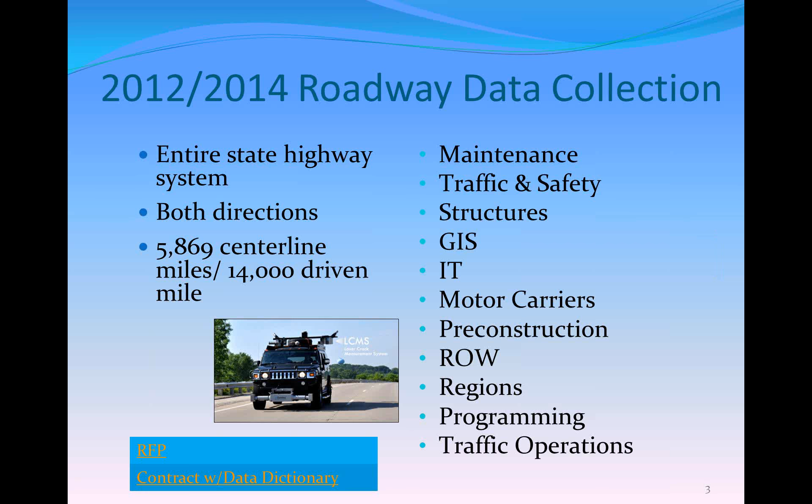And so when I speak with other DOTs, I say this is probably the most impressive slide. Instead of collecting it many, many times with many different groups of DOT, we all joined forces. We came up with common dictionary, common wording, and had one contractor collect everything from fence post to fence post.

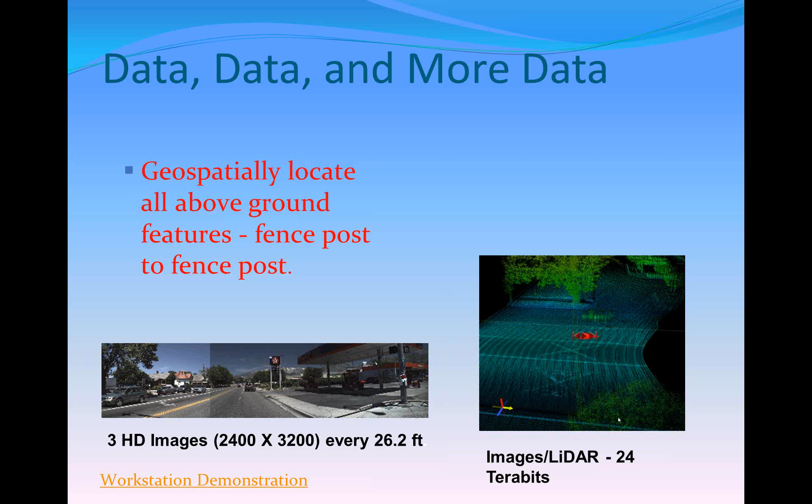So to give you an idea of what I'm talking about, here's a typical roadway. This is I-215 in Salt Lake Valley. We geospatially located every sign. But not only that, the attributes we captured were the width of this sign, the height, the MUTCD code, the lettering, the background color, and the condition, good, fair, poor. We located every single support, the type of support, the offset.

Barriers. Here we're showing guardrail and Jersey barrier, but we also did cable barrier. Again, the location, the height above ground, the end section, the end treatment. Walls. Here it's just a retaining wall, but we did noise walls, MSE walls, bin walls, all geospatially located. Lanes: these are HPMS lane designation, but we also have the width of these lanes and the type of material. Is it concrete or asphalt? Shoulders, the same thing, the width of the shoulders, the type of materials.

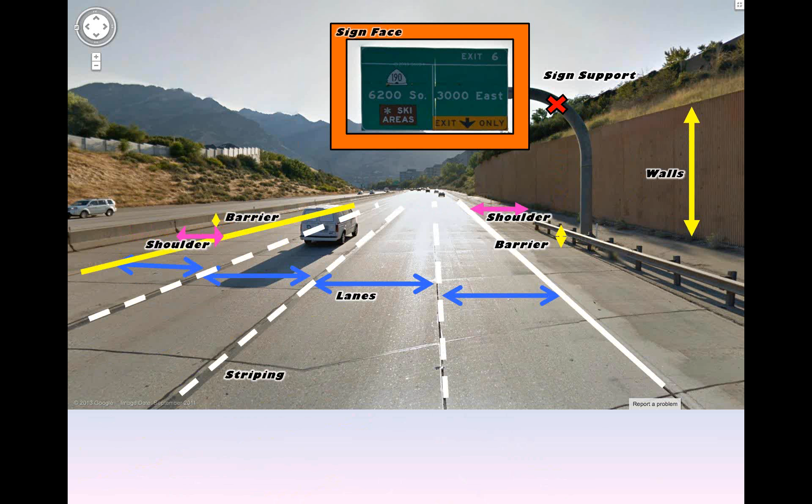All striping. Here you can see the solid, the skip, the inside, the outside lines, and these are all geospatially located. This is an image of down by Moab, but rumble strips, surface areas. This is the way we categorize how many square yards of concrete or asphalt or interstate concrete, interstate asphalt, or rural two-lane roads.

We also at the same time did pavement distress surveys. So here we're just showing automated detection of cracks, but we also had rutting, faulting, raveling, where there's crack seal, where there's not crack seal, potholes. Medians, the type of median. Was it concrete? Was it a mow? What's the width?

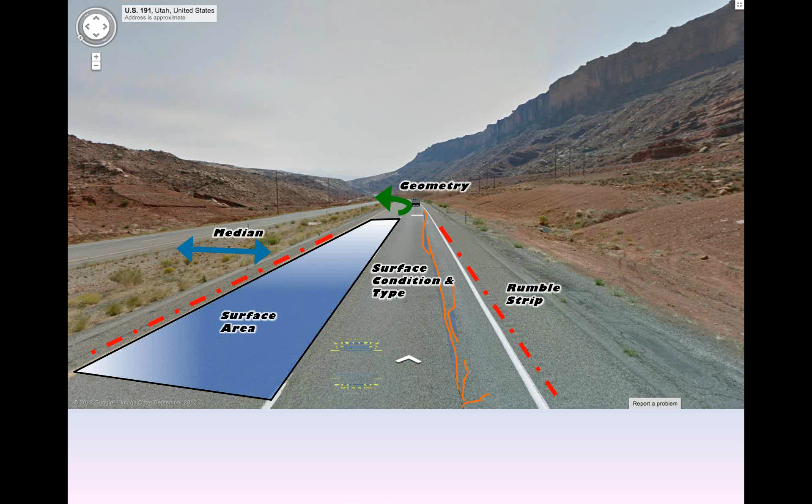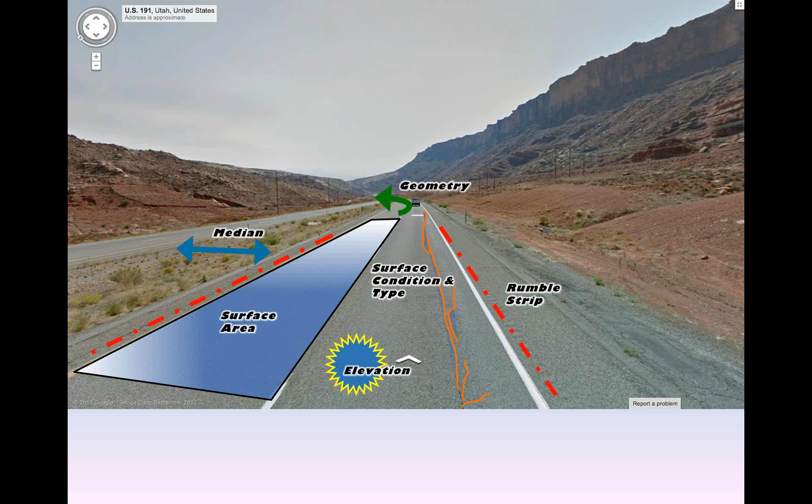Geometry, horizontal, vertical. And then in Utah, it's very important to know elevation. Elevation in Utah is anything from 2,000 feet above sea level to, I think, 11,000 feet. So that's important for wintertime operations and also summer operations. Is it too hot to place that concrete, as an example?

Typical intersections. We noted all intersections, all curb cuts, pavement markings, messages. You can see we're locating on this one bikes and arrows, but we did all kinds of pavement messages. Geospatially located again, bike lanes, drainage, whether it's in the curb, out in the roadway, islands.

Here we have curb type, curb and gutter. Signal cabinets, and then signal poles, 5-section heads, 3-section heads. And then lastly, all manholes, monuments, valves. And so it's a complete inventory, and we completed that in 2012. We did the second collection cycle in 2014, and we've located all of this information in our maintenance management system that then pulls nightly into our ArcGIS UPlan/UGate, geospatially locating all of these features.

And I think the next slide is Scott's, but let's see, it is. So I'm going to go back.

So I'm going to tell you a story. Now, I showed you all of these assets that we collected, but then the next challenge for Scott and I is to educate as many people in UDOT on what we have, and then have them start using this in their business processes. So Bob mentioned that we're going to talk about Texas turndowns. We do have Texas turndowns in the state of Utah, and I'll show you a picture of this shortly. We do have a specific program where we are replacing those Texas turndowns.

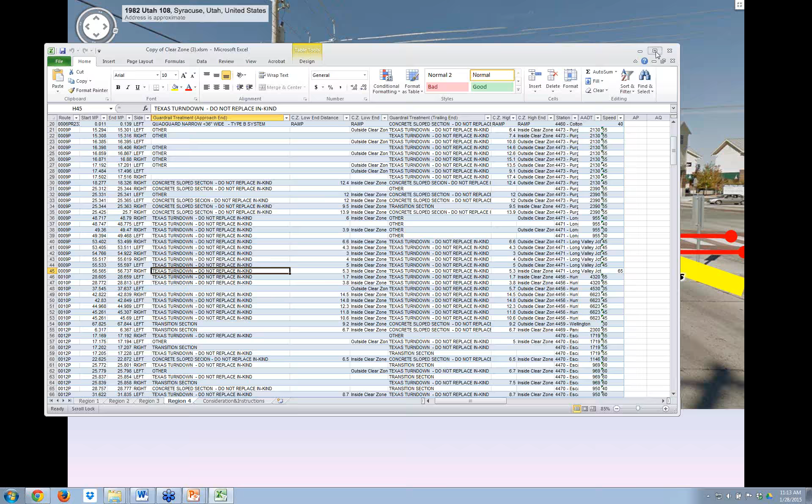So we had somebody on our staff, a young millennial engineer who's out of school the last 5 years, and I've just pulled this spreadsheet into the screen that hopefully everybody can see, and I will expand it. And so what this list is, down here in the bottom left-hand corner are region 1, 2, 3, and 4. We are 4 regions in the state of Utah, and we're looking at region 4 right now, and we are looking at all the locations with Texas turndowns and concrete slope end sections. Those were also a problem.

And I'm scrolling slowly to get to the bottom of this spreadsheet. But to get to the bottom of the spreadsheet, I have to go all the way down to 436. So we took our data from our asset management system, and we pulled from that all the Texas turndowns and all the concrete slopes in the entire state. And so I've just showed you over 400 in Region 4, which is the southern part of the state, Texas turndowns or concrete slopes that may be a problem.

So what we did then is I'm using my mouse to circle the top right column AM and AN, and you can hopefully see AM, which is AADT. So we pulled from our geospatial database and linked it to our Texas turndowns and concrete slope end sections, the ADT for that specific section of road. And we also pulled from our asset management database the speed on those sections of road.

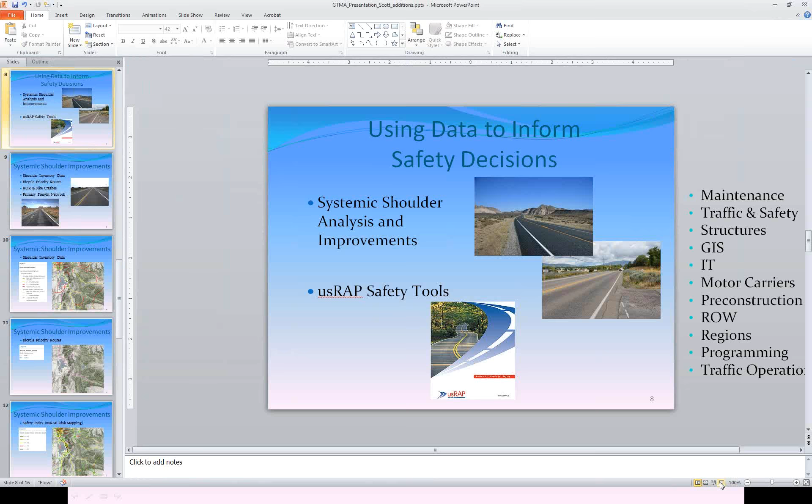I'm just going to close this file, I guess. Well, that's what I'm going to do. So now Scott's going to start his presentation, just so we get to it. Scott, take it away.

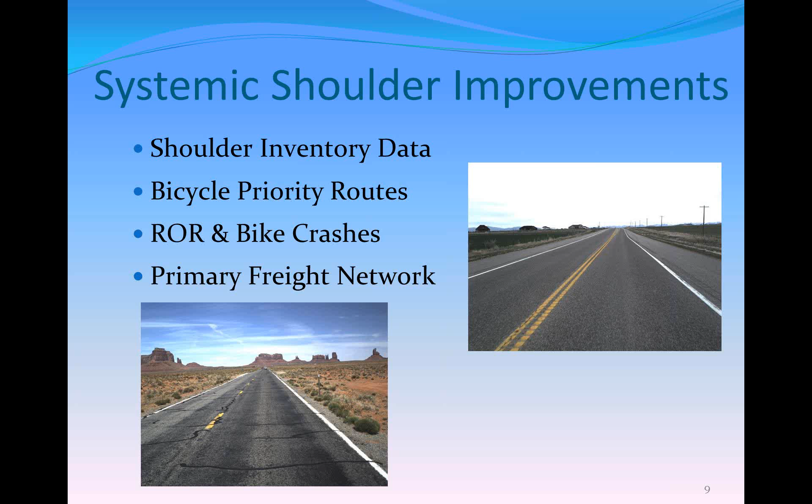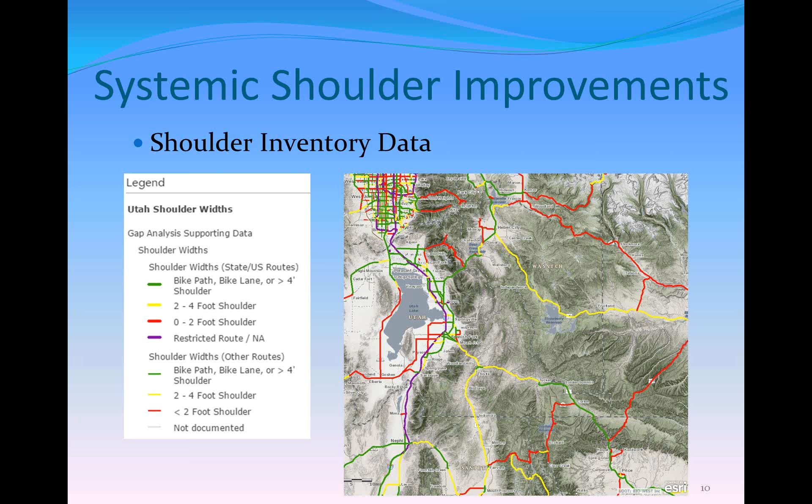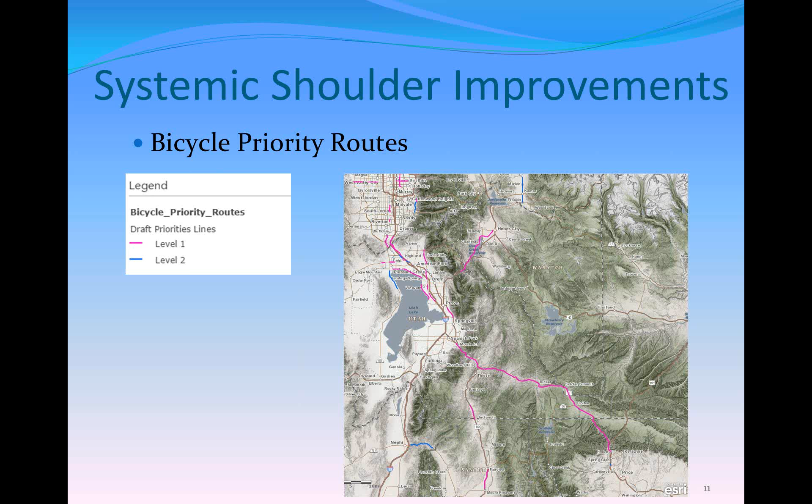So what we did is we started with the inventory of our shoulder widths. And here's a GIS map from our UPlan describing from our data collection our current shoulder width on different roadways there. We then combine that with our priority bike facilities. This was information gathered by each of our UDOT regions in cooperation with not only local governments but local bike touring groups to analyze the use of our roads for recreational bike use.

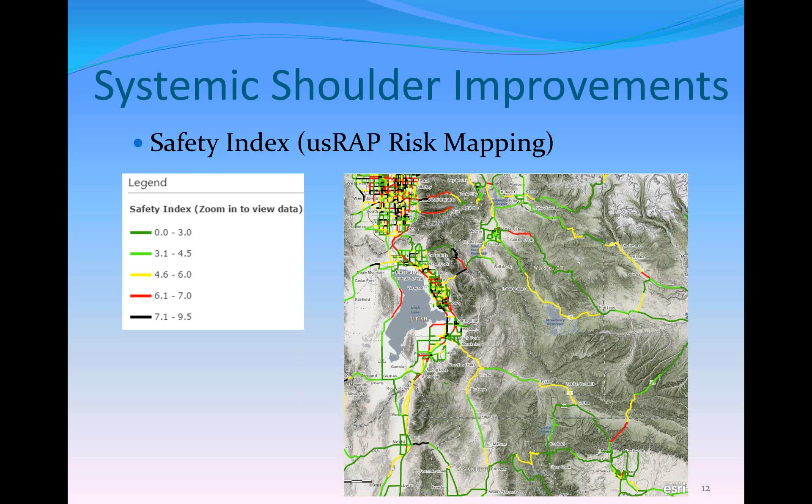And then we also threw in there an analysis of our primary freight truck routes, recognizing that freight travel not only impacted the use of the roadway, but shoulders were a critical safety component for these larger trucks that were on the roadway.

We put it all together, and as we speak, we're creating that prioritized list, much like what Stan showed you with the Texas turndowns, where we're weighting each of these factors to pick the top spots to start our systemic road shoulder widening program.

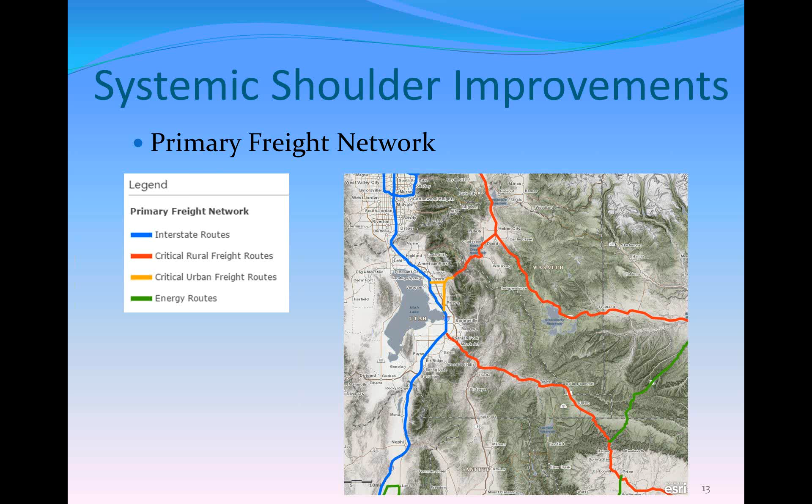So, I also wanted to mention briefly, we are using the data that we collected to feed it into a systemic safety tool. Sorry, I'm getting jumbled. This is being promoted by the AAA Foundation for Traffic Safety, who is promoting the usRAP protocol here in the United States. It's an offshoot of an international effort where these protocols were developed and they're being used around the world.

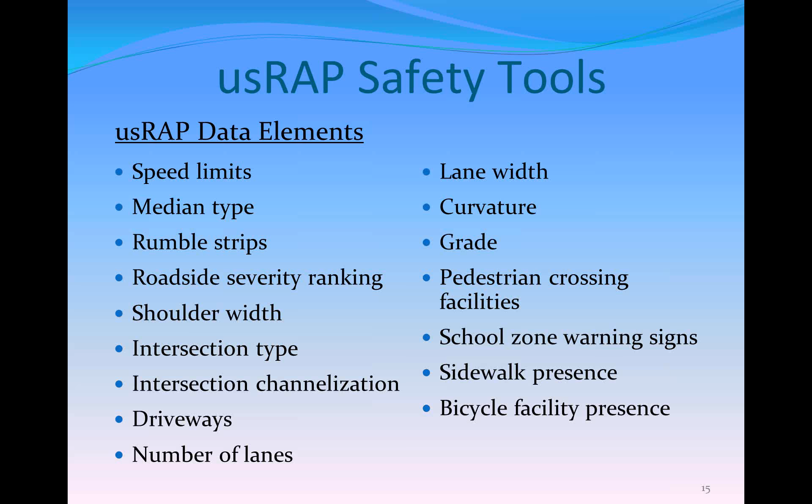I might mention these are the type of things that can be collected through a visual inspection, but in their totality, when brought together, they paint a picture of the roadway and roadside conditions that are helping us feed into the model to develop what the usRAP software called the Safer Roads Investment Plan.

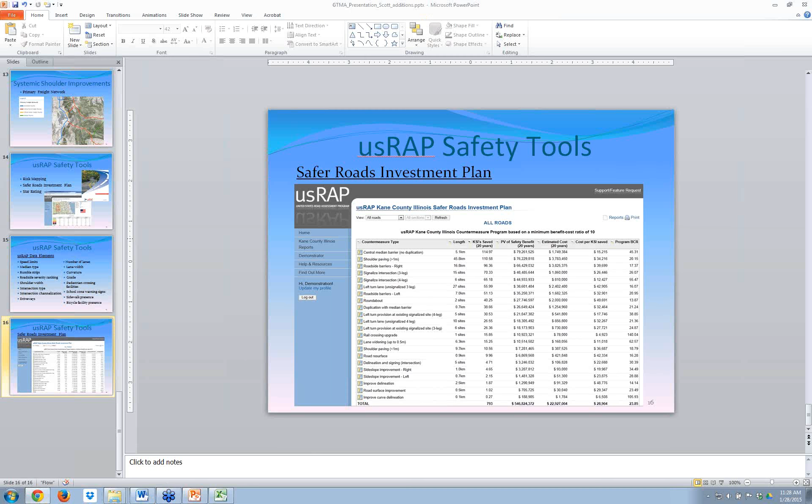I wanted to show you one other tool that we have. Scott and I talked quite a bit about UPlan and UDOT, and I want to show you that because it gives you an idea of the power of putting data in one location for everybody to use. So this is a public-facing website, and the URL is data.udot.utah.gov. And I am just going to show you a little bit of the functionality of this. Here is UPlan. The Linear Benchmark is a straight line diagram. I'm just going to give you a quick tour of this.

And you might not be able to see precisely what I'm doing, but I am showing you all the state routes in the state of Utah right now. And we're going to find out everything there is to know about a specific state route because we've organized all our data in one place. So I clicked state route 71 in the positive direction. It's 22.5 miles long. For this exercise, I'm just going to go from milepost 15 to milepost 22. And you might have seen this flash with all of these features. So we're talking about signs, guardrail, but we also have our 3-year plan, ADT, barriers, bike lanes, billboards, crash rate score. So I could find out anything there is to know about this section of roadway because we've linked all our information together.

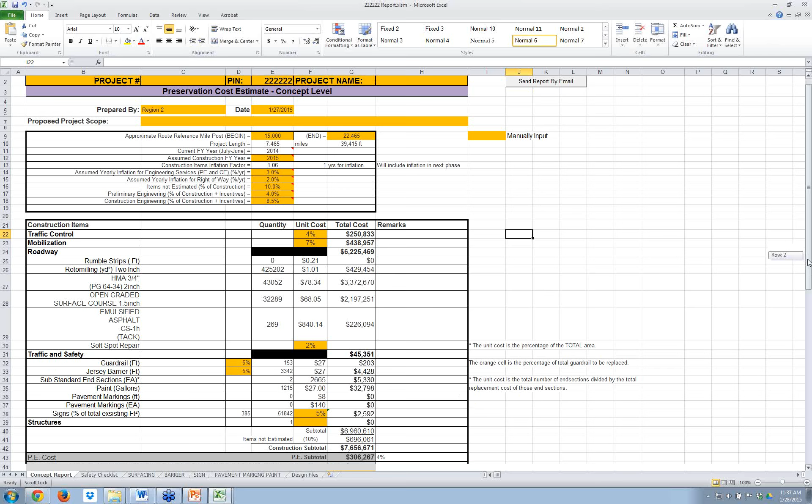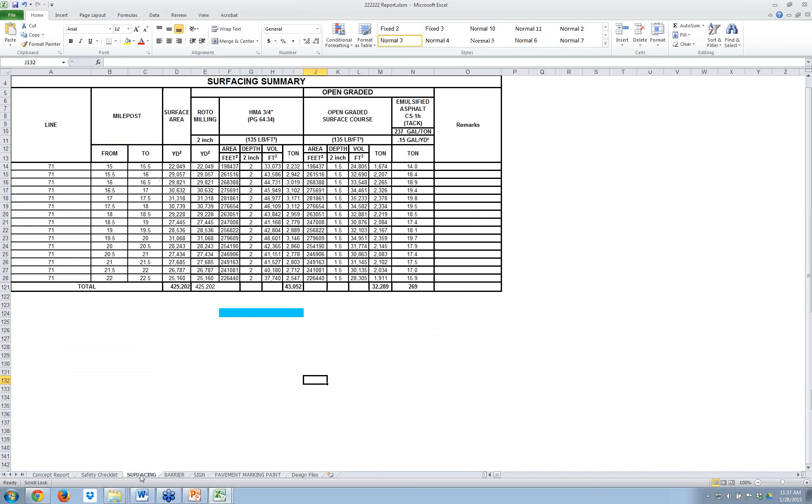And so the cost of this project, if you wanted to know, it's $9.5 million. So we're able to do that in 5 minutes. And so I showed you the surface, but I could have shown you the barrier. And guess what? They have a Texas Turndown here. So, well, let's go look at it.

Region 2 proudly says, because it's such an urban area, that they don't have any Texas Turndowns. Well, guess what? If this works, we're going to see a Texas Turndown in Region 2 in an urban area. So there it is. So, these things, all these little pieces used to get lost. Now they're all in one place.

Because I had this conversation with Region 2, a very smart guy who runs their whole design program. He said they didn't have any. And guess what we do? We never would have known that unless we could link all this information. And here's the sign data.

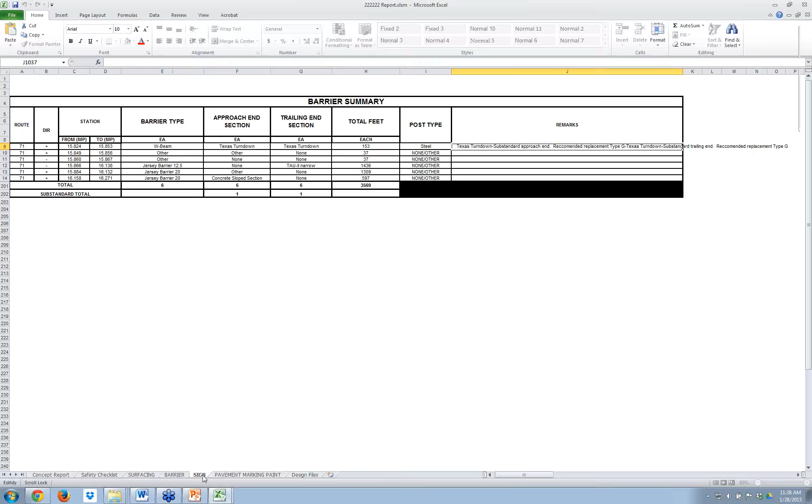And this is the exact type of format that the contractor bids. So we itemize every item for bidding. And so the contractor sees this exact thing. It's a speed limit sign. The MUTCD code is R2-1. There's the size of that speed limit sign, 24 by 30. And here are the remarks. These have graffiti on them. These have sticker. And you can see all the signs for this section of road.

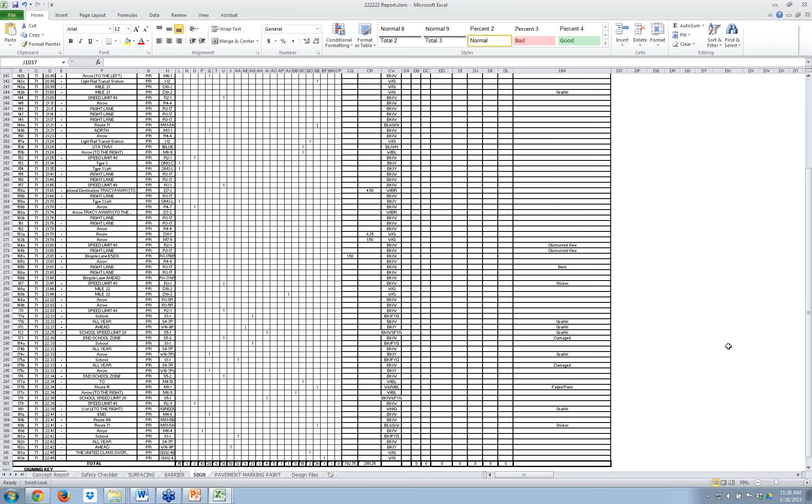Before, it just took so long to find these signs and to categorize them all that it slipped through the cracks. And it might have been done. It may not have been done. But you can see I have 300 plus signs in this section of roadway. The engineer can quickly go out with this inventory and say yes or no, I want to replace. This is faded paint sign.

So they can look at it from their office and say, do we have to replace this faded sign right there? It's a noise ordinance. So it looks pretty faded to me, and we probably want to replace it as part of this construction project. So you can't overstress the importance of collecting at once, getting everybody on the same page, and then putting it all in one location for everybody to get to it.

And so what I've shown you is the power of working together. There's tremendous savings. Scott's individual little safety projects or problems, I should say, are less likely to slip through the cracks. That noise ordinance sign slipped through the cracks before because we're doing a paving project here. Signs are secondary. Well, now they shouldn't slip through the cracks.

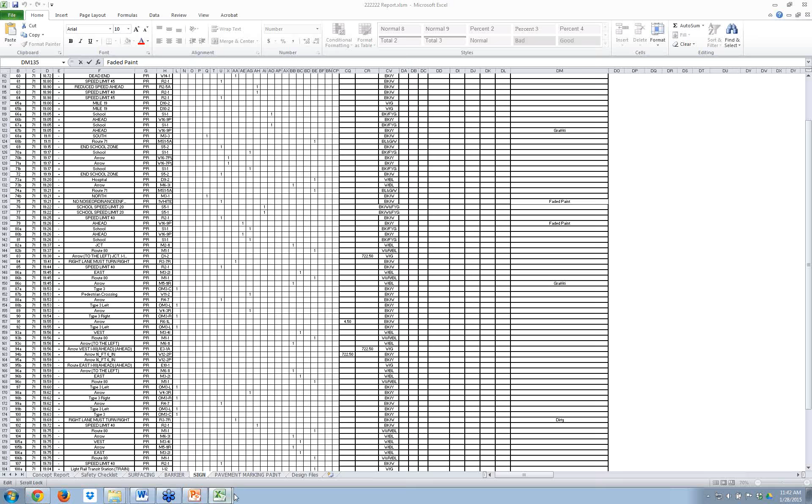You know, it was only a couple $100,000 more, because once we had the economy of scale of the contractor going out, collecting the data and extracting the data, it really wasn't that much more to get the few extra data elements that we weren't already identifying to collect.

And then, Bob, you've asked the question that everybody asks. Well, we know how much it costs. What are the savings? Yeah. And so we have started capturing those. Scott's given me numbers, and so the bottom line is we're up to over $1 million right now in savings from our billboard program.

I could have shown you every billboard in the state of Utah now. From our pavement management system, from our safety. The last thing I showed you just now, the linear straight line diagram, we estimate our savings on that are going to be 4 to 8 person days per project. And I said we had somewhere about 60 to 70 projects.

So what happened before, we had to do this inventory in the field. We actually had to go out to the field and measure the width of these roads, the number of lanes, the length of the guardrail, the height of the guardrail. And so 4 to 8 person days, times 60 to 70. And just think of the safety ramifications.

The road I showed you is a pretty busy arterial in Salt Lake, 50,000 vehicles a day. I don't know how you dodge across that road with a wheel, but I could have shown you interstate, and there we have 200,000 vehicles a day. How do you do those and be safe? And so we're up to, I think, Bob, 1.1 million in savings. Wow, that is phenomenal. Annual savings of 1.1 from the various. I told you all those folks that are part of this team, and I've gotten savings from half of them so far, 1.1 per year.